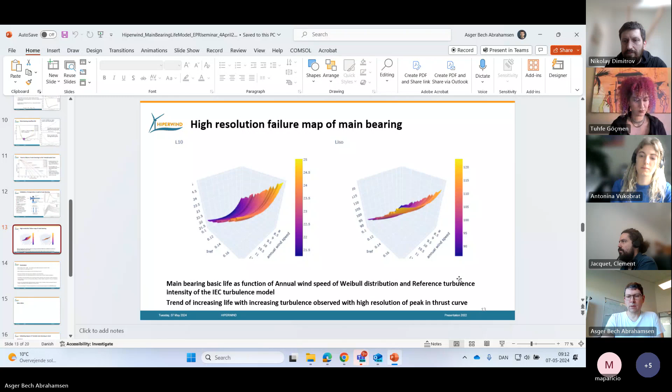Yeah, thank you, Nikolay. Let me see if I can share my screen here. Great, I hope you see the presentation. Oops, let's get that to the first one. Let me just duplicate this. Okay, one slide, one presentation. Yes, that was good. Okay, great, thank you. If something looks funny or changes, just shout out, or if you have any immediate questions let me know and I'll try to reply the best I can.

So what I'll be presenting is work we've been doing on a specific Siemens wind turbine, 2.3 megawatt machine with a 93 meter rotor diameter, looking at whether from the environmental and operational conditions of this turbine in a specific wind farm we can say something about the main bearing lifetime. There are several people contributing to this; I'll present from the DTU Wind and Energy Systems point of view, but we've had many more contributors as well.

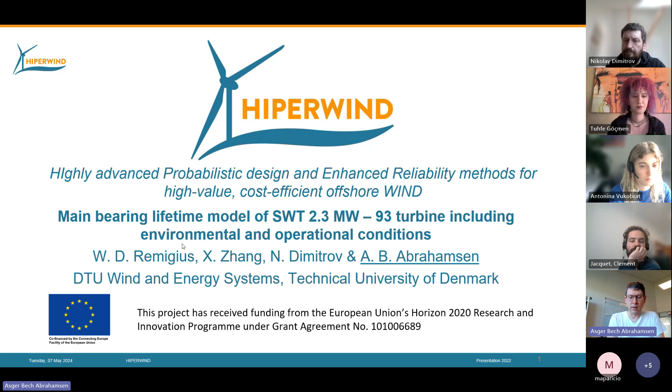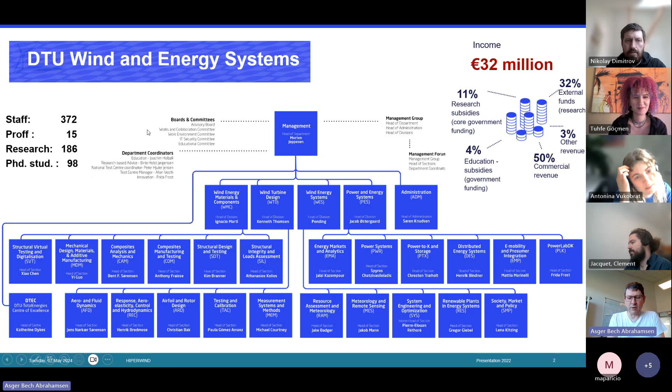Can I get to the next slide? This is just a very fast slide on DTU Wind and Energy Systems. We are 4 divisions with a lot of sections, and I'm sitting in one of these sections doing this work. So if you ever wonder how DTU looks and works, you can have a look at this. But let's get back to the outline.

So what I will present is a series of turbines, namely 27 of these 2.3 megawatt, 93 meter rotor Siemens machines, sitting in the Teesside wind farm in the UK. They are owned and operated by EDF, the French energy company. These turbines have been the inspiration for how to try to evaluate the life of the components, and we will specifically focus on the main bearing in this presentation, because as I'll explain, it's sometimes pretty hard to get detailed information of what is inside.

The reason we focused on the main bearing is that if it fails, you would need to unmount the rotor and use a jack-up vessel, which comes with a pretty high cost. So we've been focusing on the most expensive drivetrain components to replace, and we believe the main bearing is definitely one of them. Another complicated component is the gearbox, but in our investigation we had a hard time getting details on what is inside the gearbox of this turbine. So what we will talk about is how we actually obtained information about the main bearing and used this for further modeling.

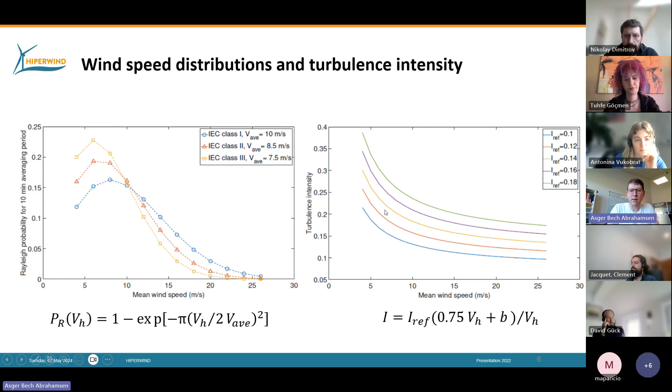Now the next thing we want to do is characterize the wind classes of this turbine. We want to investigate exposing the turbine to wind class 1, 2, 3 with an average wind speed of 10, 8.5, 7.5. And if we specify the turbulence intensity with a reference turbulence intensity going from 10% to 18%, what would the life of the main bearing then be?

And then we need to combine the two into the equivalent load. This is basically saying we need to take the FR and multiply it by the X factor, and the FA multiplied by the Y factor. And then we get this as the damage equivalent load.

It should be said that we also start to wonder what are the operational conditions. So we are saying the temperature of the turbines is 22 degrees. We're taking the summer period, and the cleanliness of the grease is quantified as something called an EC value of 0.7. You can say 0.1 or 1.0 is super clean, as clean as you can get. If you have a grease cleanliness of 0, it is super dirty. And that has a huge influence on what the main bearing life will be, of course.

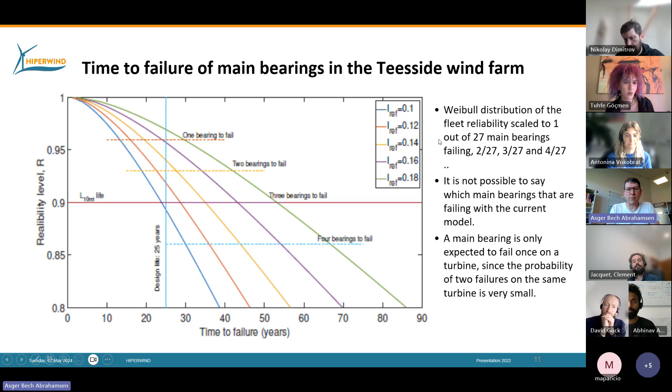So this is 2 out of 27 bearings failing, then we should expect that a little bit before year 20. 3 bearings failing would be just around here, and 4 bearings failing would then be around year 30, if we're running with the low turbulence intensity. So this is how we interpret this model.

Okay, I'll finish up in a second. So one question that came up was, we predicted around 70 degrees for the main bearing, which people and ourselves also said is probably a bit too high.

What we have also done is look into more specifically the effect that if you change the turbulence intensity, you get a lower life. So the basic rating of the bearing is here, and you can see that the life is actually decreasing as we go to lower turbulence intensity. This is with a lot more simulations than what you just saw before. So we do believe we have mapped the peak of the turbulence intensity, or the peak of the thrust curve, in great detail with this map, and it's not just an artifact of sampling the peak of the thrust curve. We believe it's a real phenomenon, if you can trust ISO 281.

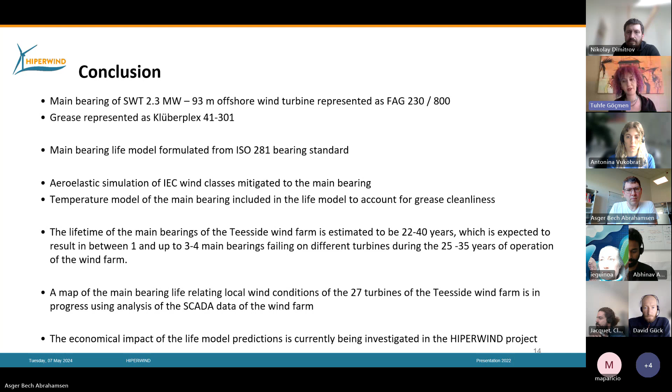Yeah, just one small one. Maybe I missed it, Asger. It's just to understand—it's very clear how the sensitivity looks when it comes to failure or lifetime versus turbulence intensity, but the sensitivity to wind speed is a bit lost on me. Is it for the entire, or is it for a given wind speed that the TI sensitivity is more visible? How does it work, like in a threefold correlation, if you will?

Here you have the annual wind speed of the Weibull distribution, so this is the change we see on annual wind speed, which is not too pronounced. And this is the reference turbulence intensity of the IEC specification of the wind class. So that is what we see—turbulence intensity is the major, or the main, contributor to this.

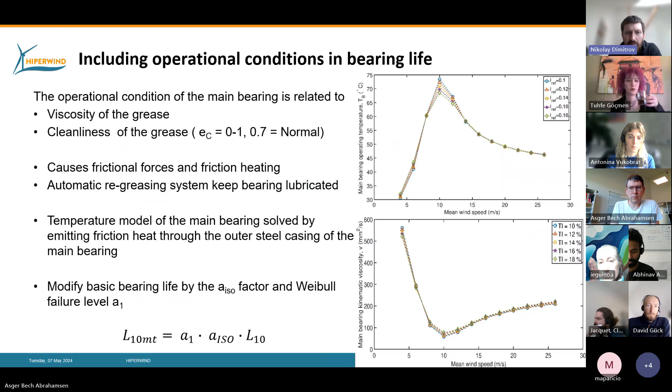We also see that if you look at the same plots under different turbulence intensities, this is also where you see the main difference between the life or the damage accumulation. You can see here that sitting at this point, at the top of the thrust curve, this is clearly where the load is highest. And since we're feeding that into this raised-to-the-power-3 power law, any change away from the peak will have a huge effect on the life. So if you imagine running at a wind speed of 10 meters per second all year round, you'd be sitting exactly at this point constantly.

Whereas if you increase the turbulence intensity, you might be smeared away, falling down the tip of this mountain here. Of course, you can kind of ask why would fluctuations cause us to go down this hill? But that is because the pitch system, the pitch controller, is kicking in. So if you're fluctuating around this peak here on the right-hand side, the pitch controller will start doing actions, and that is what will cause us to have these fluctuations bringing us down the hill.

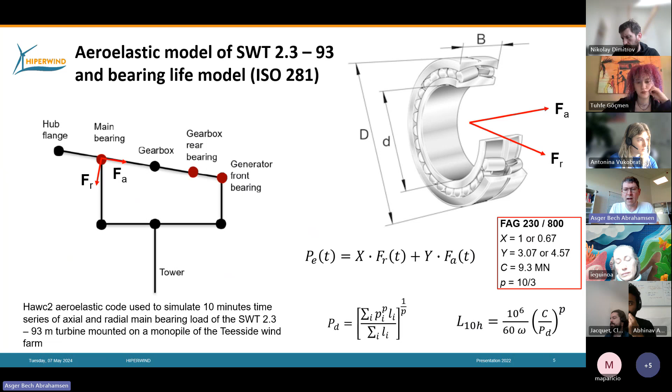One thing you should also remember is that we are not doing rainflow counting for averaging the loads. We're doing cycle counting. So we're asking how many cycles during a 10-minute wind speed series are we sitting exactly at the top here, and how many cycles are we doing just at a point next to it - say 1, 2, 5% away from the peak. That is basically what goes into this equation, the cycle averaging. That's why you have to remind yourself it is not a rainflow counting scheme, but a cycle counting averaging. We are really reading off what the load level of this curve is, and how many cycles we are doing at those load levels.

Okay, was that answer enough, or? Thanks. Yeah. Definitely. Thanks a lot.

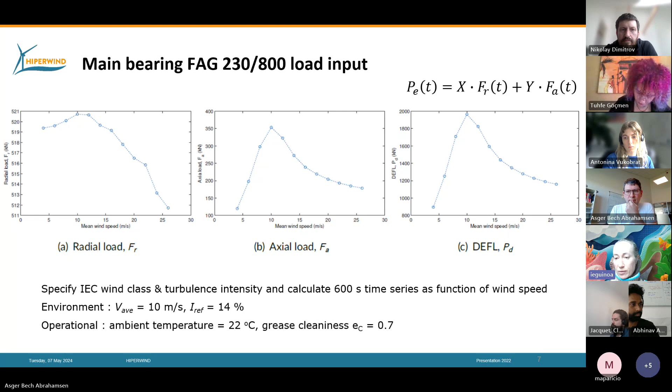Rene? Yes, one question. Did you have the chance to make some kind of validation against real wind turbines, in terms of load measurements or something of this kind?

Yeah, some. We cannot tell too much about it, I think. But what we have done is, of course, asked if we could get some load measurements, which turned out to be not that easy. So we don't have any load data to compare to. So what we have looked at is what is the actual turbulence intensity of the wind farm, and compared that to the design conditions.

Because you can kind of say that the design conditions of the turbine is 0.16. So we're up here with an average wind speed of around 10, 8.5 over here. So this is the design point. And you can kind of say that the turbulence intensity of this wind farm is probably lower, quite a bit lower than the 0.16, because we are offshore.

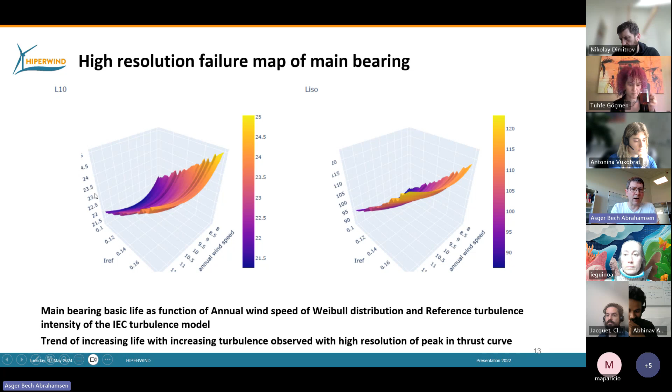So what we are speculating is, of course, if this wind farm should actually have the tendency to slide down on main bearing life. But I can maybe, without revealing too much information, say that the Teesside wind farm has not replaced any main bearings yet. And our model has not predicted any main bearings to be replaced yet.

But it is also reported that for EDF, they are very focused on keeping the main bearings alive. Apparently they have a scheme where if they see any vibration or temperature issues with a main bearing, they will flush all the grease out of the main bearing - take all this grease, flush it out, and then re-grease the bearing afterward. So they have a preventive maintenance scheme, which is probably much better than what you would get from the ISO 281.

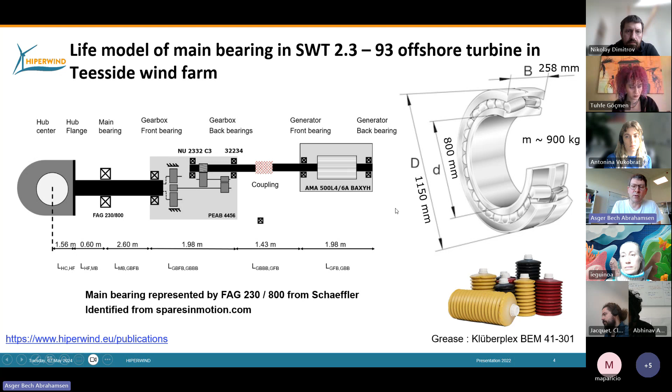But of course, the bet is we're saying 1 to 4 bearings should die in the wind farm during the 25 years of operation. They haven't seen any yet, but it remains to be seen if our model is correct. We have not predicted 10 bearings should have failed already. So in that sense, the model and what has been observed in terms of how many main bearings have died is kind of still... it takes years.

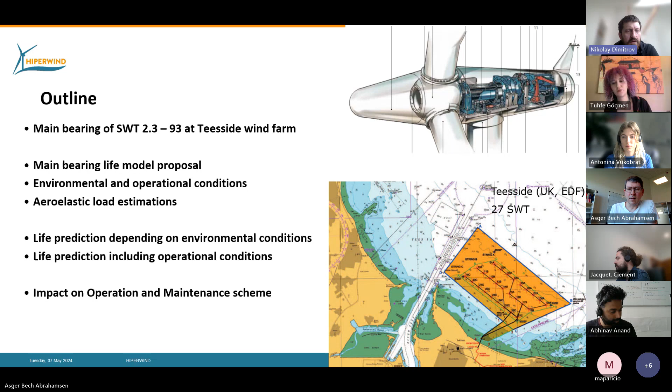One more thought - I think we're also trying to validate some of the assumptions, like the temperature models. I don't know if that's going to be a public deliverable, or how it was. Remains to be seen. But clearly, the temperature model 2 is much closer to what is observed than model 1. We're working on model 3 currently to see if we can do a little bit better.

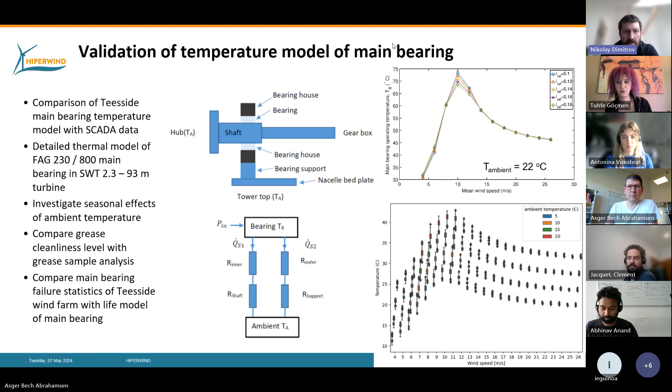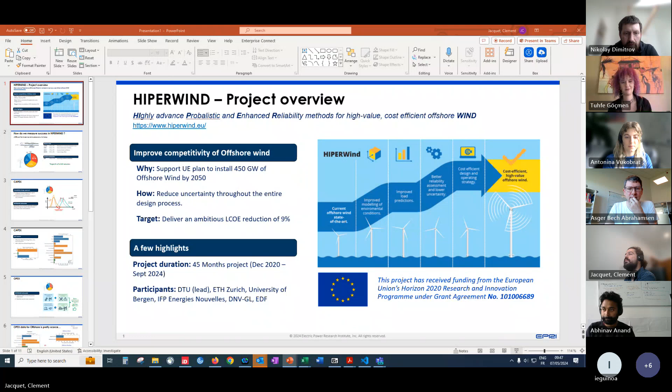Thank you. Okay, perfect. Thanks for the presentation, Asger. I'm trying to stay as interesting as you are, but talking about cost is a bit more boring. Just as context, Hiperwind is mostly about getting better at designing the turbine from beginning to end, to increase the competitiveness of offshore technology by reducing cost, by reducing uncertainty throughout the process and factoring in probabilistic design.

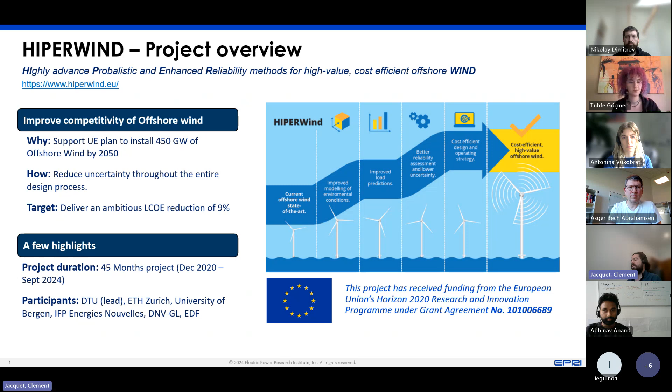So what Asger showed is that if we get a much more accurate model of the main bearing, we're able to predict failure more accurately, and maybe compute the maintenance plan in a more accurate fashion. The question I'm trying to answer is what's the impact on cost? I apologize, I've mixed slides from different presentations, so the template might not be super consistent. I hope you'll forgive me on that.

Just a word on how we measure success in Hiperwind. One metric we look at is LCOE, a simple metric that quantifies the cost required to produce a unit of energy. Behind the formula, we look at the sum of all expenses for a given year, levelize by the discount factor, and normalize by the energy produced that year, also normalized by the factor. The good thing is it's relatively simple. We could argue whether LCOE is the best metric, but it factors in all the aspects Hiperwind is looking at.

So we're going to try to look at CAPEX reduction. That's mostly by introducing probabilistic design and reducing uncertainty, so we're able to reduce the component mass, making the component lighter and cheaper.

On OpEx, it's about getting better at predicting failure and maintenance, being more accurate on your window to access the site, so you're not necessarily bound to doing replacements in the June to August period, but can do it in a more optimized way with better wind and wave data, and anticipate maintenance when you know components are going to fail, reducing cost.

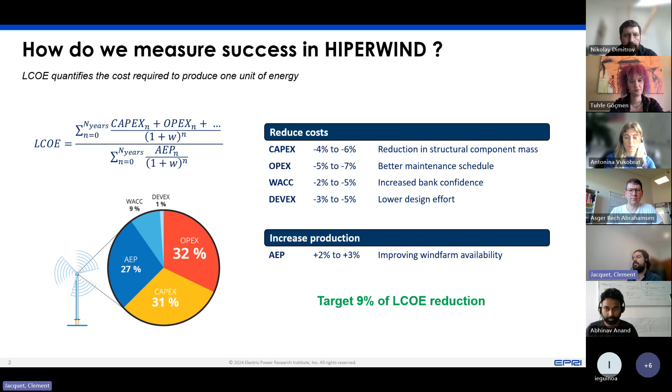For CAPEX first, it's relatively simple. Hiperwind is looking at probabilistic design—I'm speaking under the control of Nikolay here, so I hope I'm not going to say something too stupid—but basically, if you get better at predicting your loads, you get a narrower distribution, and if you design for a fixed failure probability, which is the overlap between the load distribution and the material strength distribution you have...

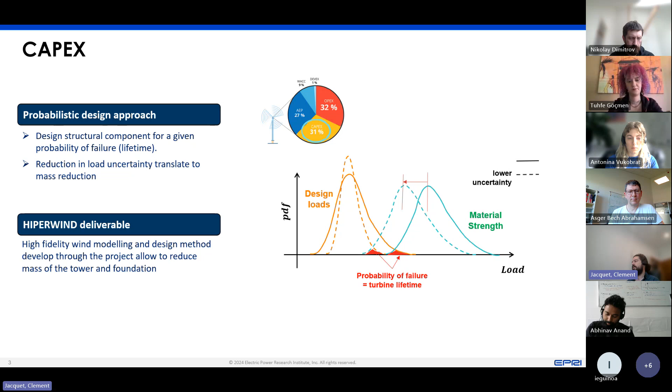If your load gets narrower, you can shift your material strength distribution towards the left, meaning a lighter component, and in the end a cheaper wind turbine. The deliverables from this work package of Hiperwind are a reduction in the mass of the tower and the foundation, and we can directly compute the impact on LCOE because the CAPEX data in the literature is pretty well documented.

At EPRI we have a strong effort on quantifying the cost of wind technology, either onshore or offshore. We get a good breakdown, an idea of how much a turbine will cost per kilowatt or per megawatt. We also like to get a good idea of the cost breakdown - for instance, this is for an offshore fixed bottom, so you can see the structure, the foundation represents a little bit more than 15-17% of the cost of the turbine.

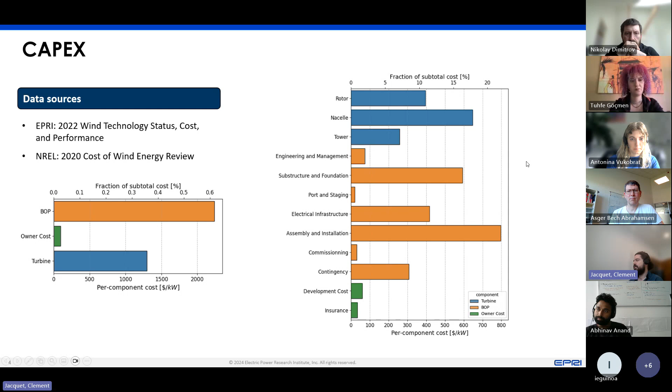So if in Hiperwind we can get a 20% reduction on the cost of the foundation, which seems realistic, then in the end that will factor in as a 5% reduction in the CAPEX or something like that. So that's the first aspect.

Regarding the OPEX, there are two main components we want to look at. One is what Asger is doing - getting way better at modeling the components, so anticipating the failure, which means you get a clearer idea of the number of replacements you need to do each year, and then you can plan accordingly. There's also a work package focused on prediction of wind conditions and extreme weather - wind and wave - so you get a more accurate idea of when you'll be able to access the site and perform the repair.

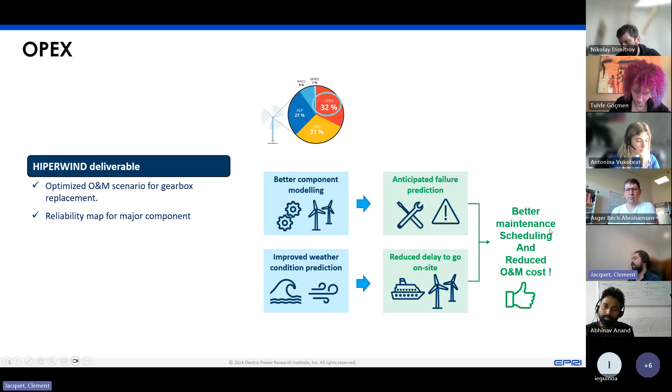So EDF is working on an optimization tool that factors in component failure and wind and wave conditions to optimize the maintenance schedule. In the end, you reduce the downtime of your turbine and you can also reduce the cost. It seems to be a bit more of a marginal reduction in costs because everything is in the end fixed - if you need to replace components, the only cost that changes if you do it faster is the vessel cost, which is still a big portion of the cost. But apparently where we gain the most is mostly in the reduction of lost production, so the increase in AEP.

Then the question is how do we factor that into the LCOE calculation - making an optimization on a very specific task, like replacing the main bearing, or actually I think EDF is working more on replacing the gearbox, because as Oscar mentioned there isn't so much failure on the main bearing at the Teesside wind farm, so they're looking at the gearbox. So how does that impact the OPEX overall?

For onshore, we get a pretty good breakdown of what the OPEX looks like. That's data from EPRI's report, but you can also look at WoodMac - you'll get similar results, maybe with slightly different categories, but a similar breakdown. You can say, for instance, if you're able to reduce your consumption of wind turbine parts, how much it's going to impact your OPEX.

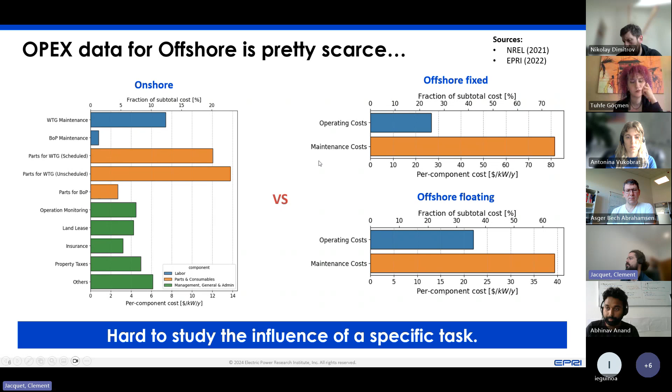But what we have for offshore is much more scarce. Most of the time everything is referred to this NREL study that they publish every year - cost of wind energy - and they split things between operating costs and maintenance costs, and you don't get much detail on which fraction of the maintenance cost is due to replacement of the main bearing, for instance, or replacement of the gearbox. So we need to be a bit more clever if we want to take the inputs from the other work package and factor that in.

So the concept we are developing is really to try to develop a simplified O&M model that takes as input the component failure probability. For each of the main components of your wind farm, you can get EPRI's database, for instance, of reliability of turbine components, and we can make regression on that and know what's the Weibull distribution that predicts the component failure for the main bearing or for the gearbox.

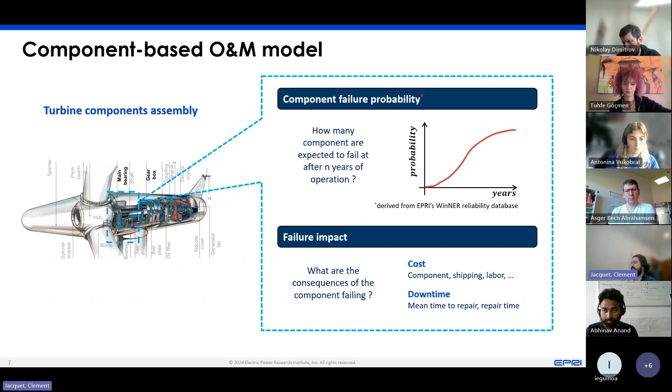And from industry data, we can also get an idea of what the cost of the component is from the CAPEX, and shipping and labor cost can also be found in the literature. So we can quantify the component's likelihood of failure and the failure impact, both in terms of cost and downtime, and come up with a very simple O&M model to assess the operating cost. Basically, for each year, the OPEX is going to be the sum of the component failures over each of the components.

How many failures do I have for that component, and what's the cost of the failure for that component, which breaks down into the material cost, the labor cost, and also the vessel cost for shipping the new components to the site. And with the failure probability, we're able to estimate.

You know how many components you need to replace, you know what's the cost of a replacement, and so that gives an estimate for your yearly operating expenses. And on top of that, we can add fixed costs.

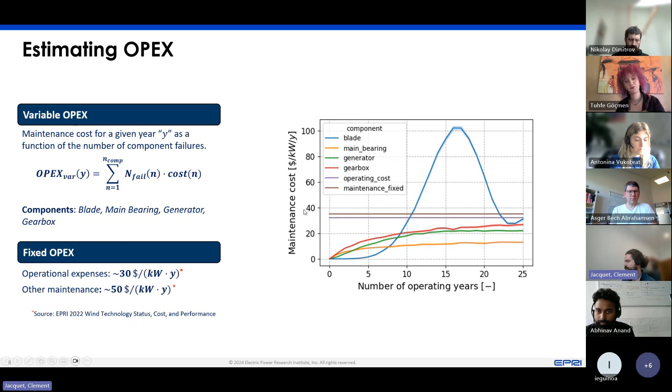And the same goes for the downtime. We know what's the average downtime per component failure, so that's kind of aggregated data we can find from the literature on the time to go to sites, also the lead time to get the new component, and then the time to perform the repair. There, EDF is performing optimization, so we will be able to factor in the real data for the Teesside wind farm for the specific component they are looking at, and so we get the total downtime per year.

Then we assume this is uniformly distributed over the year because the model is relatively simple. So we just get a single metric for the wind farm availability, which is the ratio of the downtime divided by the total number of operating hours per year. And so that gives an extra loss that we can just scale down our AEP.

So the net AEP includes the internal losses, the wake losses, electrical losses, and other losses in the drivetrain, for instance, if we get a detailed enough model. And so that gives the net AEP, and on top of that, we scale by the downtime, and we get to the effective AEP.

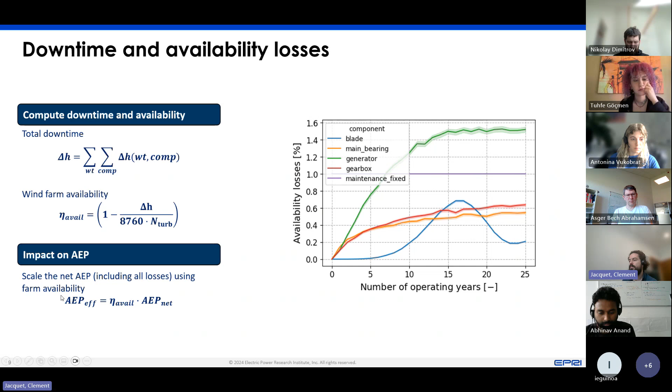And so once we have that, that represents the baseline. We're just taking the things before Hiperwind.

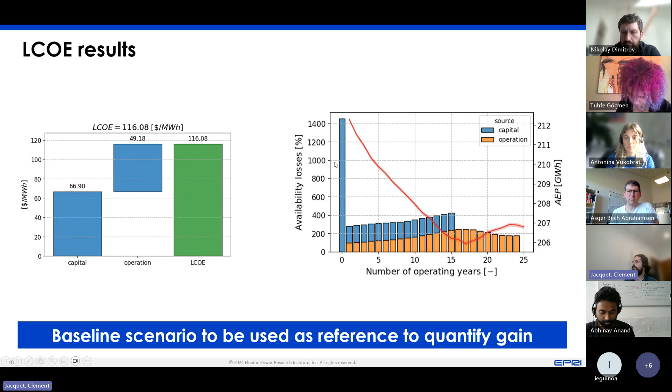So yeah, that's the concept of what we are doing for the cost modeling. The idea is that in the end, this tool is also going to be made public. So we need to define exactly what can be made public, because there is a lot of confidential information, for instance on the OPEX of the Teesside wind farm, a lot of it is confidential. Also, we are using failure data from our reliability database, which is a service we typically sell.

So we might not be able to give the most accurate model, but at least we will produce an online version of the tool, maybe with a simpler model in it that allows us to compute the LCOE for any wind farm. So we're really trying to make this model as modular as possible, so we can replace each sub-model and increase the level of detail. As long as the OPEX model spits out something that the overall class understands, we can make the model as complex or as simple as we want. So hopefully that will be a deliverable from the project.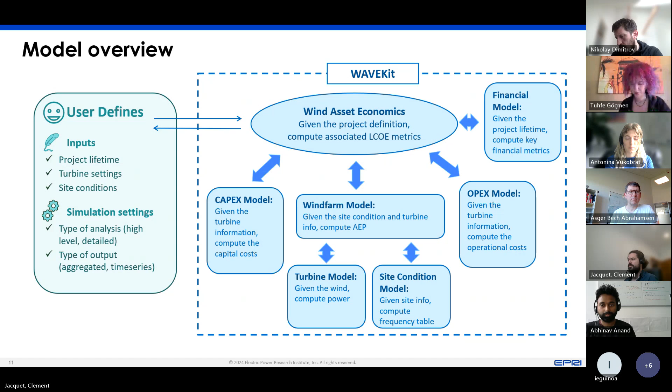So I think that's all I had. I'm just going to stop here if there are any questions.

Many thanks, Clement. So was I very clear or very boring? I think Irene already has a question, so definitely. No, not too boring at all. So many thanks.

Well, you mostly asked my question in this last slide, thinking of the potential collaboration with TWAIN and how to not reinvent the wheel. So do you have any time schedule to make public this, even the simplified tool, or what are your expectations there?

Yes, so the Hyperwind project stops in September, so I'd say September is going to be the hard stop for that. The tool's architecture is almost there, I'm just finalizing the last part of it. So if it's also for research purposes, I think I should be able to give you the source code and train you on how to use it. So I think it can be done relatively quickly, as long as we...

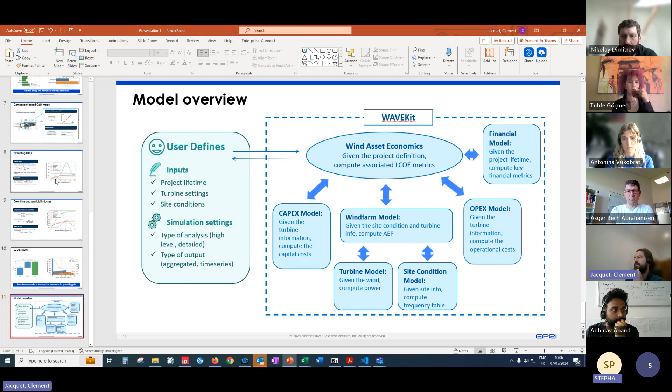No, not necessarily a mistake. It's just the database we have, a big database of turbine models, so you can drill down to platform level, component level, manufacturer, and even supplier level. I just took the data we had for the Teesside turbine, which is the Siemens 2.3 megawatt, and what we have is when the failure happened, or more precisely when the component was replaced after COD, so the number of operational years when the failure happened. What we found for this specific turbine model is that in our data, all the blades were replaced the same year. I think it's because they realized there was maybe a manufacturing defect or something, so they changed everything preemptively, giving us a huge spike in the distribution.

So when we try to fit the Weibull, that gives that shape. But I would argue it's not necessarily representative of component aging and failure rate increasing with time. It's really that at some point the person operating the wind farms with those turbine models realized they needed to change all the blades preemptively. So I'd say what we get out of the regression for the failure probability is not representative of the entire fleet of Siemens 2.3 megawatts that are out in the wild. Okay, thanks.

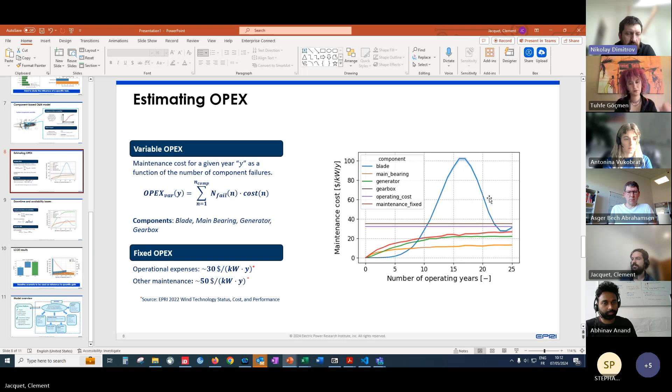Okay, thanks. And then the other question is on slide 10, you had the LCOE given in euros. This one actually seems a bit above the standard target you'd have for modern wind farms, or at least if you make a call for tenders, you probably won't get far with this cost. I don't know if you think that's the one actually valid for Teesside, or how does it work?

Yeah, actually that's something we'll need to discuss next week, because I think what really matters here is that the turbine is 2.3 megawatts built on an offshore wind farm. So nowadays it's not going to be that. And if you think about what dominates the operation, or at least how people typically model the OPEX, if you look at what NREL has, or also what Strathclyde is doing, it's the vessel cost. Just the vessel cost is 90% of the component replacement, just by how expensive the vessels are.

So then your operational costs just scale as a linear function of how many turbines you need to install to reach a given rated capacity of your wind farm. Nowadays people tend to go to 10, 15 megawatt turbines, and so they get the numbers you see here. I think that's NREL data, based on an 8 megawatt turbine, and in the latest 2023 version they use 15 megawatt turbines for the model.

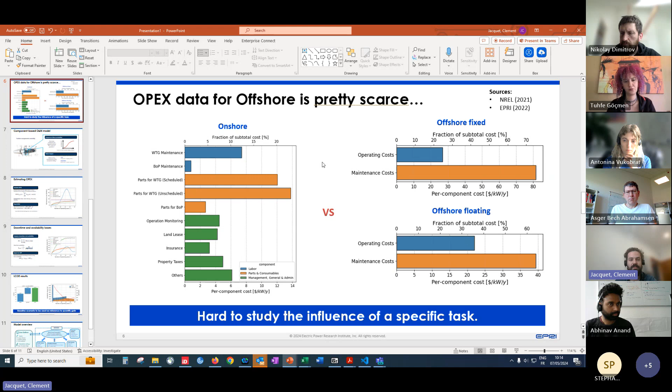But yeah, I don't think we can answer that until we have more data. So to your point, yeah, it's above what we see in the industry, but it's also because we are looking at a very small turbine rating. So we'll need to think about, maybe what we need to do is consider for Hyperwind delivery a more recent, more state-of-the-art wind farm to compute the LCOE. But that's a question for the meeting next week.

Yep, thanks. Asger, maybe last comment or question, and then.

Yeah, well just a comment on this LCOE level. I think there's a paper dating back to the first UK offshore wind farm saying Teesside is the most expensive ever UK wind farm, right? So remember it's many years back, and the support schemes for getting those wind turbines or farms to operate were really different. But this also shows you how much money they probably get in support now. And as that support is ending, they will transition into market operation. So it's a remnant of 15 years back in time or something like that.

Yeah. But maybe just a question for you, Clement. I can't remember, what is the interest rate that you use for calculating this LCOE? Is it the low level now, or the kind of old high?

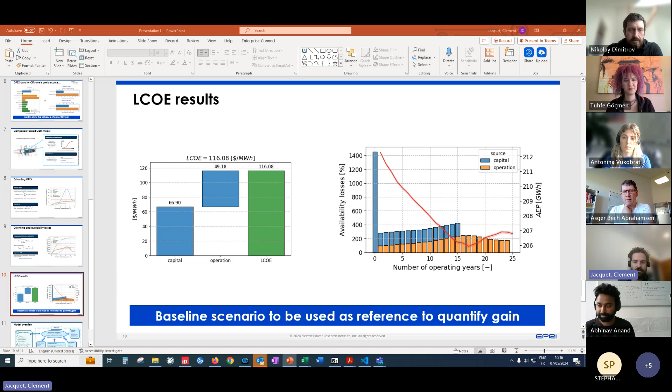Yeah, I used the recommendation, what we had in EPRI's research. So it's US based. I should have them somewhere in another presentation. So yeah, it's a 3% interest rate. We have like 60% debt and 40% equity. So when you compute the weighted average cost of capital, I think it's something around 6%.

Yeah, okay. Quite a lot. Which I guess is also a bit high for most projects today, isn't it? Or maybe before inflation, and now we're up again. I don't know. Yeah, that's actually the annoying part, because then you do all those things to get better at the design and everything, and then you just change 1% the interest rate and you double your capex. And you're like, why do we bother?

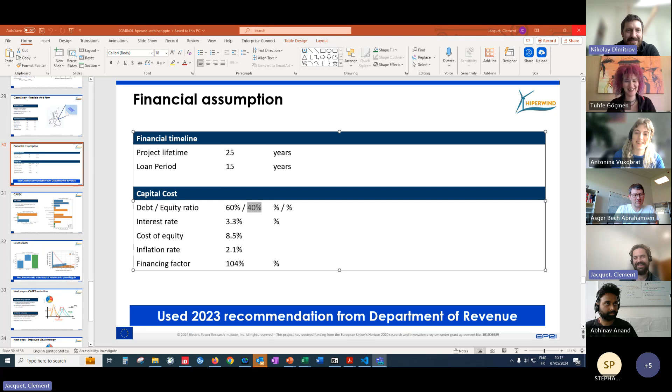Yeah, yes, yeah. Okay, thanks Clement, for a very interesting presentation. Again, I don't know why you think it could be boring when we talk about money, really. Yes, I think that's actually what everyone in the end is trying somehow to, also sustainability and saving the world. But somehow, I think if you also reduce the costs for anyone, then you're more convincing. So I think it's very good. Thanks, a way to keep you interested.

So now, I have maybe also a very small overview of TWAIN. I don't know if I should do it or Tufhe, unless you have some 3 slides that you think you could give a very quick overview. What do you prefer? I need to open them up. If you have something ready, go ahead. Okay, I'll go ahead with this.

But I don't know if it's the best, so let's just go very quickly to tell you what TWAIN project is really about, so that we can see how to connect what we just saw with how it can be utilized in TWAIN. So, going from Hyperwind to TWAIN.

TWAIN is a project about data-driven, or really integrated, wind farm control. The idea is to use all the currently available methodologies, and maybe develop a few new ones, mostly data-driven, in order to improve wind farm control. But I think the main innovation is that you go beyond the simple levelized cost of energy or power maximization focus. Instead, you try to include multiple objectives, and this is one of the reasons why it's called integrated wind farm control, because you try to really include different data sources.

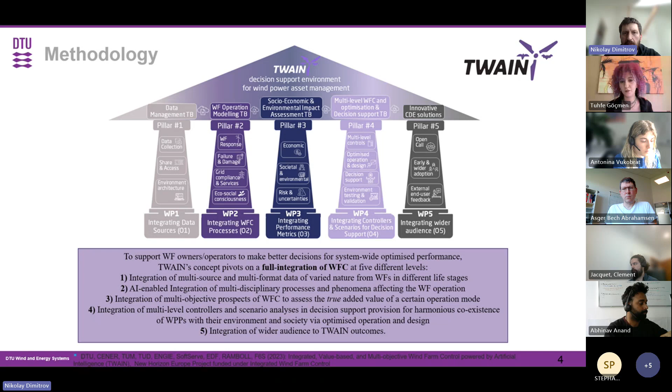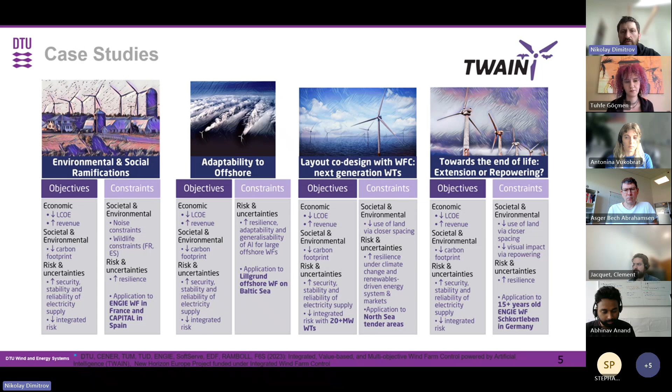How can you design the layout of the wind farm and the wind farm control together, so you get the best wind farm out of it? That's for future wind farms, and also considering there are so many existing wind farms - what can we gain for existing wind farms in terms of extension or repowering, end of life decisions. Talking about reliability, it could apply to many of these use cases.

I want to show another slide on TWAIN Work Package 2.2, on damage and failure - the discussion we're having today. This really feeds into or links to the discussion on bearing reliability and O&M costs. The purpose of the task is to develop tools forecasting damage and failure of various components. If you look at this purpose, forecasting failure of various components, or damage or failure rates, could be very much the same as what we saw for the main bearing that Asger presented.

Talking about what we mean by forecasting damage and failure - there are different terms like material degradation, damage accumulation, failure rate, and this may be somewhat different depending on the type of component. If we talk about leading edge erosion, it's material degradation. If we talk about tower or foundation, it's damage accumulation.

Talking about fatigue, and if we consider bearings, gearboxes, or other replaceable components, we may talk about failure rates or times to failure, as we saw earlier today. Also, as Tuhfe and I mentioned earlier, it's really the impact of control actions on all these parameters that is the key question. If you change any control action, how could it affect all these? Because after all, the project is about improving wind farm control.

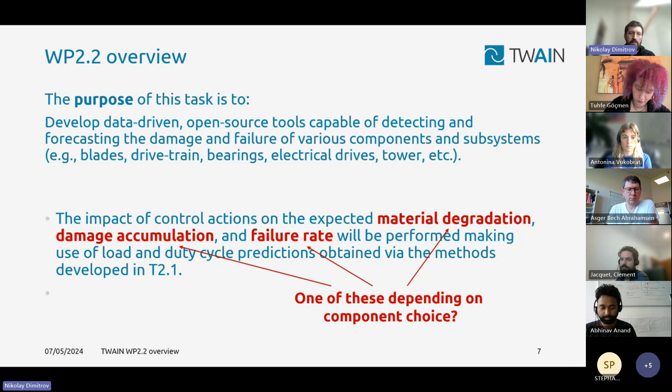So that's a very quick overview of the task. There's one more slide which goes into more detail: blades, support structure, drivetrain, leading edge erosion, and different partners who want to look at each of these.

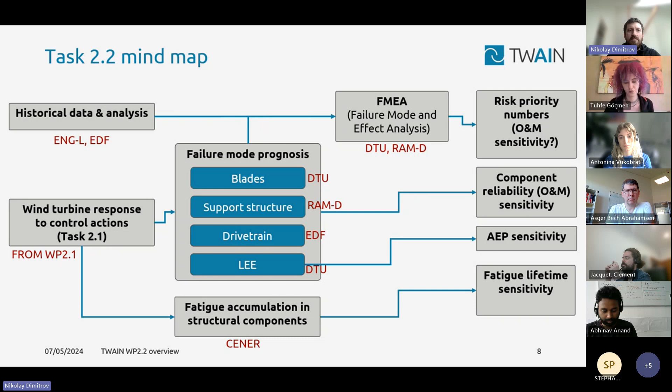That's a quick overview, and I think I have no more slides here. From now on, I think we can have an open discussion, if that's okay with everyone. Of course, if you have any questions specifically on task 2.2, please go ahead.